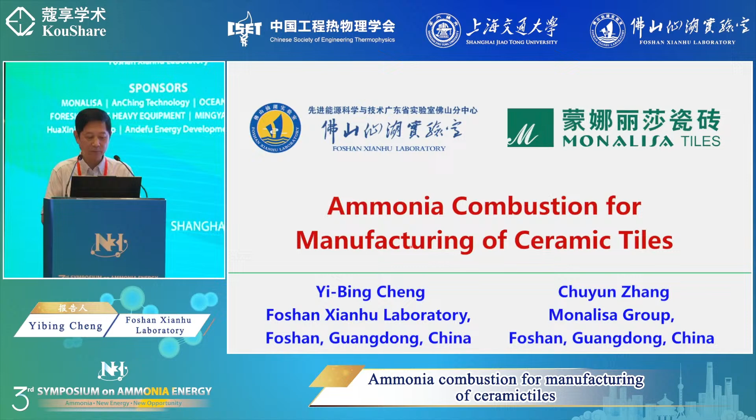The title of my talk is ammonia combustion for manufacturing of ceramic tiles. My name is Yibing Cheng from Foshan Xianhu Laboratory in Guangdong, China. Now, let me first give a very brief introduction about the Foshan Xianhu Laboratory. The Xianhu Laboratory is jointly established by Foshan City Government and the Wuhan University of Technology. The institute is focused on hydrogen energy research. It's also establishing the National Energy Key Laboratory for new hydrogen ammonia energy technologies.

It was established at the end of 2019, and in the first phase, the funding was $210 million US, and the current phase is about 280 million. It's fully funded by the government. Now, the institute is focused in two areas. One is hydrogen energy and fuel cell technology. Another is hydrogen ammonia technology.

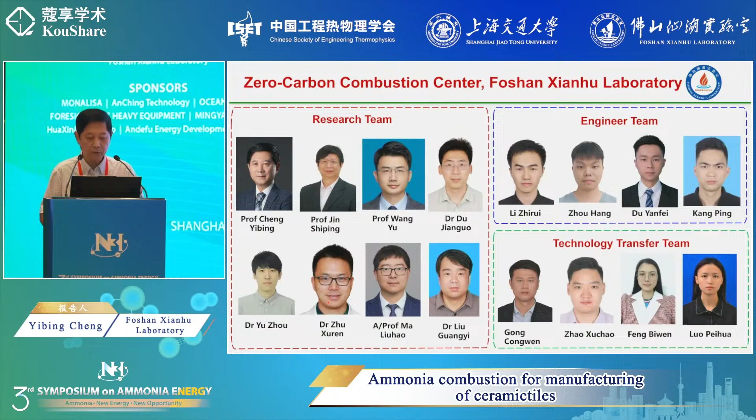So the first stream is using hydrogen through electrochemistry to convert it into electricity. The second stream is using hydrogen as a fuel to generate heat to either power the internal combustion engine or to power industrial furnaces. I'm heading this second stream, that is the zero carbon combustion center in this lab. In our center, we have a research team, engineer team, as well as a technology transfer team.

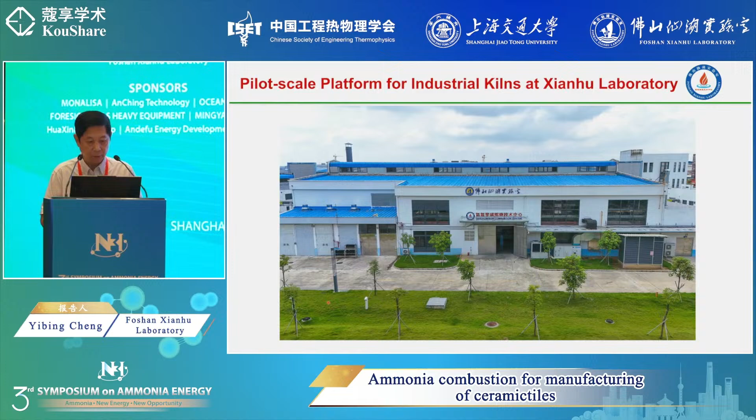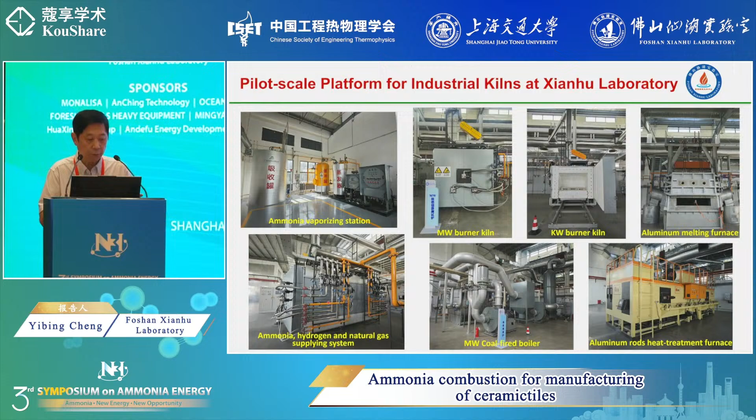Now, this is our lab. Our lab is 1,700 square meters, and we have a number of pilot scale industrial kilns, and they can fulfill a number of different functions. They can be for firing ceramics or aluminum melting or coal-fired boilers and aluminum extrusion and various different types of industrial products, which largely fit into Foshan's industrial structure. All these furnaces are equipped with ammonia, hydrogen and natural gas as a fuel.

Now, the objective of setting up this center is largely to meet the high temperature industrial challenge, because China is a heavy manufacturing country. And in China, we have a lot of high temperature related industries: electricity generation, metallurgy, steel, ceramics, cement, glass, and so on. All these industries are major sources of carbon emission. If you look at this map here, power generation, heating, manufacturing, and building materials account for over 70% of carbon emission in China. So this is a very large proportion of carbon emission.

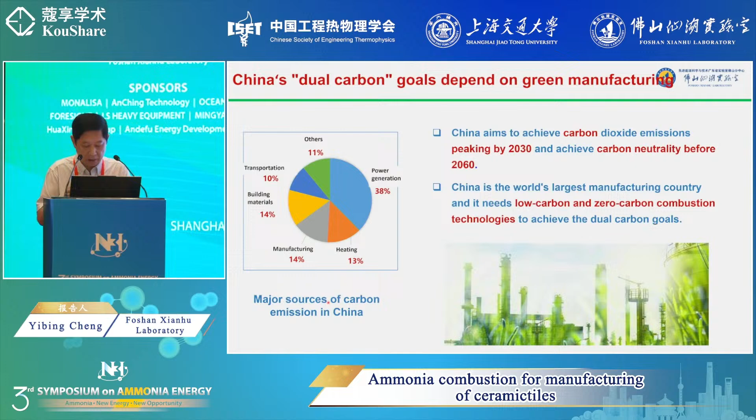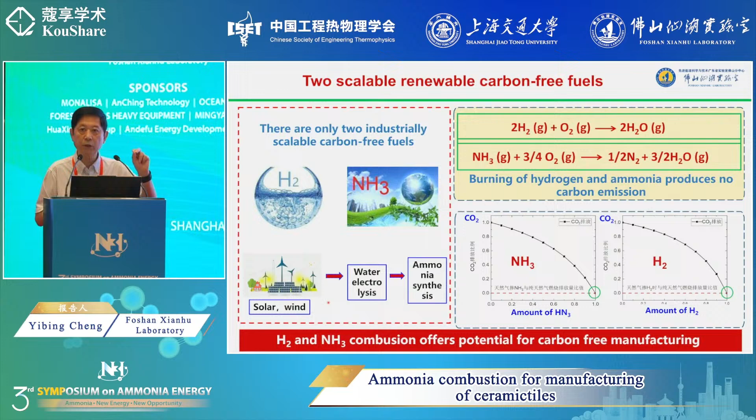The Chinese government has committed to achieve carbon dioxide emission peaking by 2030 and to achieve carbon neutrality before 2060. We call them the double carbon targets. To meet these double carbon targets, we must meet the challenge of the high temperature industries. We must develop low carbon or zero carbon combustion technologies. And as we know, there are only two scalable renewable carbon-free fuels, which are hydrogen and ammonia. When they combust, they do not produce carbon dioxide. When they are mixed with fossil fuels, there is a reduction of carbon emission. When they fully replace fossil fuels, they can go to very low or zero carbon emission.

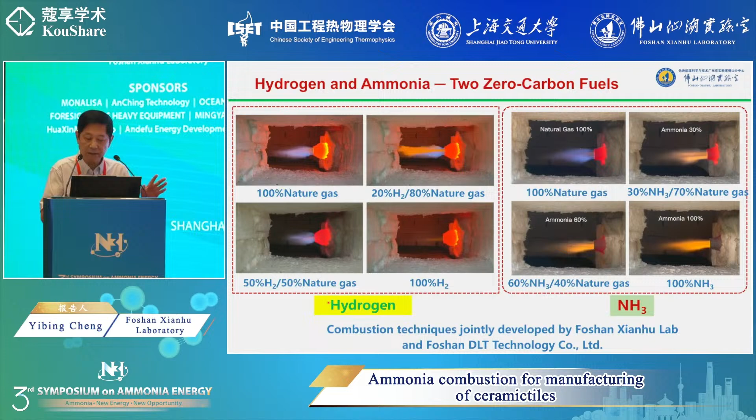Now, for these two fuels, we have tested them all. We have mixed hydrogen with natural gas or ammonia with natural gas. We can do them fully or mixed. And you can see that they have no problems in combustion. But there is a problem for hydrogen, because the transportation of hydrogen is quite challenging. And the storage of hydrogen in large quantities is also quite challenging. And this is a particular issue for manufacturing industries.

Let me give you an example. A ceramic production line requires 8 tons of hydrogen. And it requires 24 hours firing, 7 days a week, and 300 days a year. So for that, you must have a certain quantity of hydrogen stored in the factory. With today's technology, that is quite difficult. And if you store 3 days of fuel, that is 24 tons of hydrogen. With today's technology and regulation, that is almost impossible.

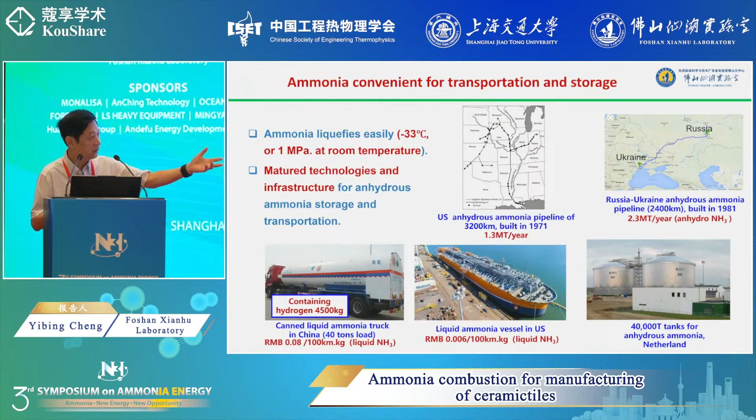Whereas with ammonia, it's a different story. Because ammonia was a fertilizer, a chemical, its regulations are quite mature. And it can be transported by trucks, by ships. Russia and America have long pipelines operated for over 40 years to transport liquid ammonia. And they can also have very large storage. And you can see that they have a 40,000-ton storage. These are quite mature.

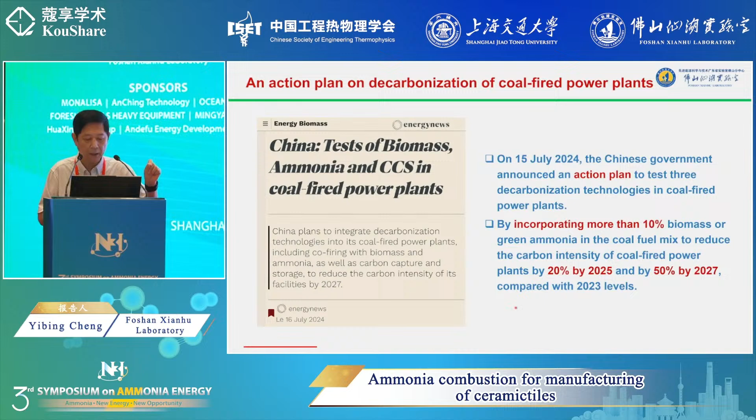Now, in recent years, China has initiated quite a lot of activities related to ammonia as a fuel. A recent development: on July 15, that is two months ago, the Chinese Energy Administration, that's the Chinese government, announced the action plan to test three decarbonization technologies in coal-fired power plants. They advised incorporating more than 10% of either biomass or green ammonia to achieve a 20% reduction by 2025 and a 50% reduction by 2027 compared to 2023 levels.

So what does that mean? In China, about 60% of electricity is generated from coal. In today's Chinese standard, for coal-generated electricity, each kilowatt-hour emits 0.91 kilograms of carbon dioxide, whereas for natural gas, each kilowatt-hour of electricity produces 0.46 kilograms of carbon dioxide. So what does that mean? It means that natural gas power emission is roughly 50% of coal power emission.

So according to that, you can see that by this demonstration action plan, it aims by 2027 that coal-generated electricity in China should roughly meet the natural gas emission. So that is quite an effective way of doing carbon peaking.

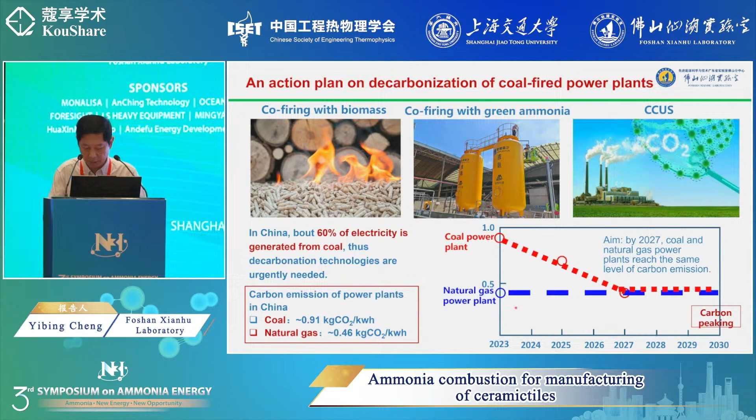Okay, let me give you some progress we are making in ceramics. On the 27th of December 2021, the Xianhu Laboratory combined with two local industries in Foshan, that is Osino Ceramics and DLT Technologies. One makes ceramics, the other makes ceramic furnaces. We formed a joint R&D center for advanced zero-carbon combustion technology. The aim was to modify this 30-meter-long pilot line from natural gas to ammonia.

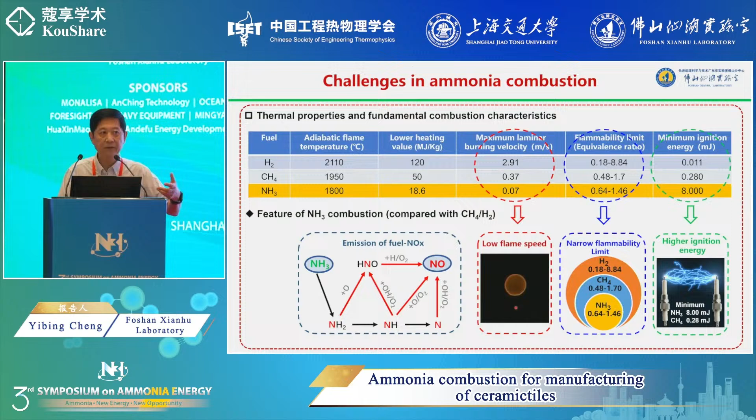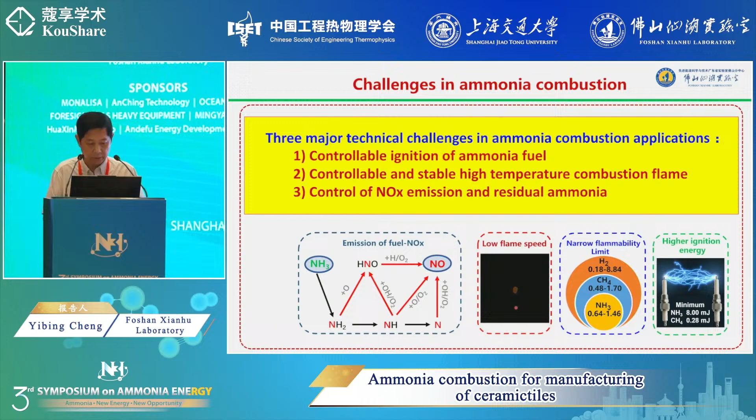As you know, there are a number of challenges to combusting ammonia, because for ammonia the laminar velocity is low, the flammability limit is very narrow, and the ignition energy is quite high. Also, because it contains nitrogen, there is nitric oxide emission. So for ammonia combustion in industry, you must overcome three major challenges: how do you do a controllable ignition, how do you do a controllable and stable high-temperature combustion, and most importantly, how to control the NOx emissions and the residual ammonia.

So on that basis, we developed ammonia burners for stable ignition and combustion. Here you can see this is a normal burner. We can ignite it, but we can't sustain the combustion. Whereas for the new burner we developed, you can have a stable ignition and also a stable combustion. So it's very important to develop a specially designed ammonia combustor.

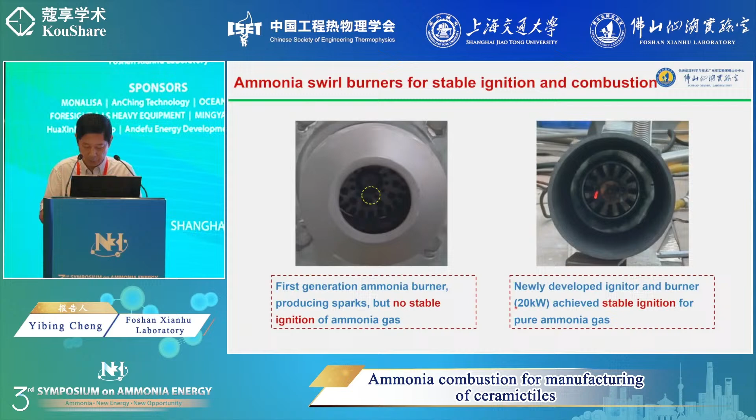Then we started to retrofit this kiln using the newly developed burners, and we developed multi-level approaches for de-NOxing in ceramic kilns. The first step is staged burning, then SNCR, and then SCR. The staged combustion burner has been very effective. You can see that the reduction of NOx by the staged burner has been quite obvious.

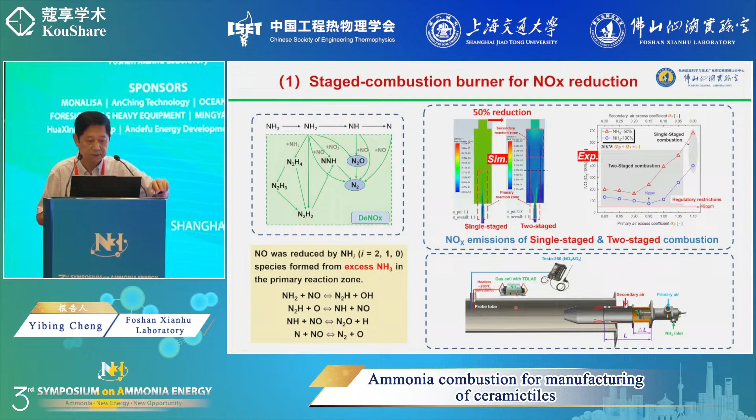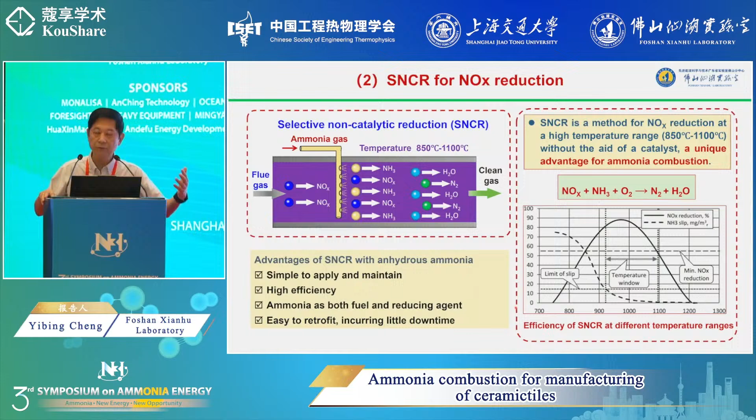We have also done selective non-catalytic reduction for NOx reduction. This is the advantage of ceramic kilns: because the firing temperature in ceramics is 1250, you can very easily identify a region in the kiln around 900 degrees C that allows for SNCR. And at the final stage, we have SCR for final de-NOxing. You can see that after all this, the reduction of NOx is very obvious. Finally you can get about single-digit ppm.

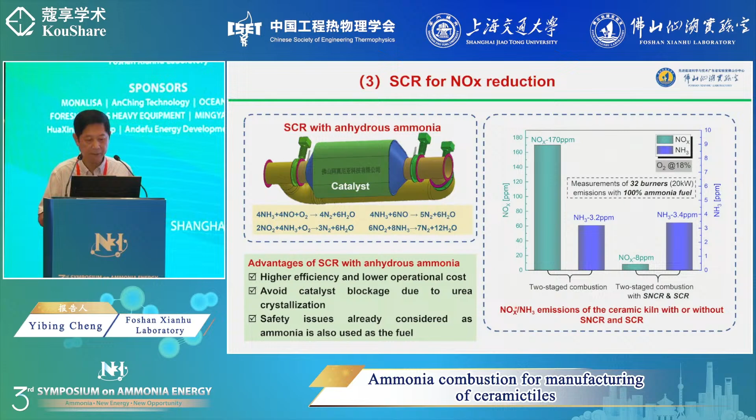After these combined multi-level approaches, we can significantly reduce the NOx. You can see that the staged burner gives roughly 35% efficiency, SNCR roughly 50%, and with the final SCR you can achieve 90% efficiency. So the final NOx emission is getting very low.

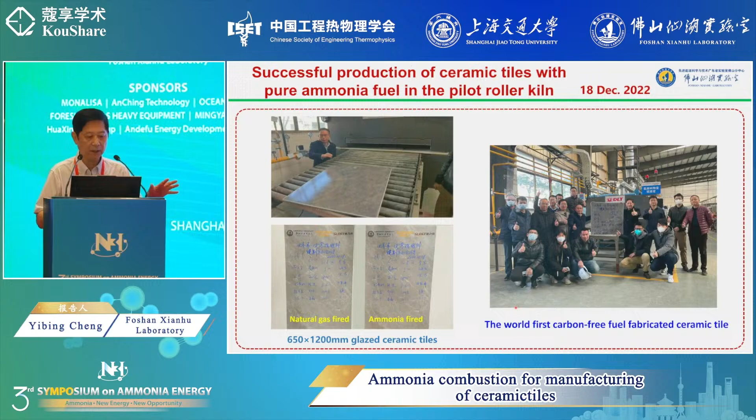It's getting very low. So on the 18th of December 2022, we successfully made the world's first ceramic tiles fabricated with carbon-free fuel. This is around a 650 by 1200 millimeter tile, and it was fully fired by 100% ammonia. This is certified by third-party companies who have done the exhaust analysis and some tests.

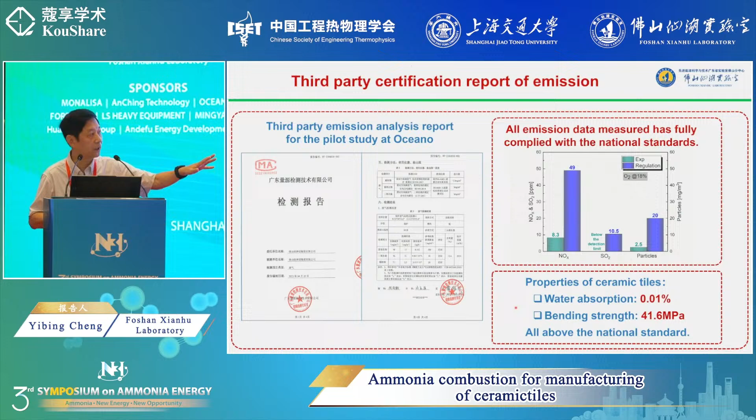You can see on the right side, the blue bars are the government regulation for NOx, for sulfur dioxide, and for particles, while the green bar is our result. You can see that the NOx is far below the government regulation, you almost can't see sulfur dioxide, and the particles are also very low.

Whereas after this pilot study, obviously the challenge is how are you going to move this further to mass production? And there are a number of challenges for doing mass production because of the high cost of retrofitting the production line. Ammonia is much more expensive than natural gas. There's no industrial standard or regulations for ammonia as a fuel. Ammonia has never been used as a fuel, so there's no regulation or standard to allow us to do that.

And also, the housing market in China is cooling, so the sales of floor tiles are also reduced, making it more difficult for the companies to implement new technologies, and another issue is that there's not enough green ammonia for you to do so. Let me tell you a tale of two private ceramic companies in converting this pilot study into mass production.

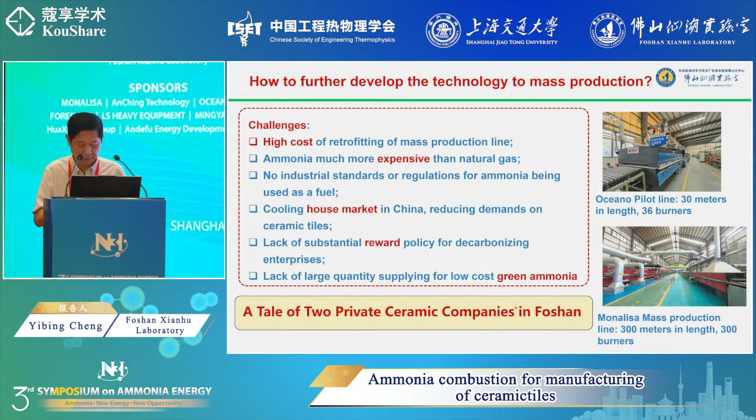For the pilot study, our collaborator was Oceano. Oceano is a private company. Its parent company was market listed. The sales in 2023 were roughly about $450 million annually. And they make all various different kinds of ceramic floor tiles.

Now, let me introduce another company, that is Monalisa. Monalisa is also a ceramic tile company, and it's itself publicly listed, and its annual sales are roughly about 950 million. So it's roughly two times the size of Oceano in terms of ceramic tiles.

Now, by late 2022, before we actually started our pilot work, Oceano informed me that they would continue to complete the pilot study. However, after the pilot study, they had no funding for doing mass production. They had already informed me, and that made me a bit nervous. Now, obviously, for me, my objective is to move that to industrial production.

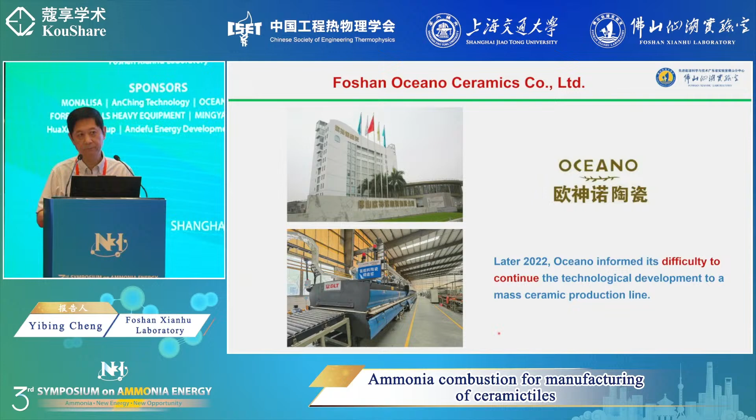So, on that basis, I started to talk to Monalisa. Monalisa is also in Foshan, one of the leading ceramic companies in China, the first publicly listed ceramic company in China. And Monalisa expressed interest; they have a 300 meters long ceramic tile production line, and they'd like me to convert that to ammonia. That is 1.2 million square meters of ceramic tiles per year of production.

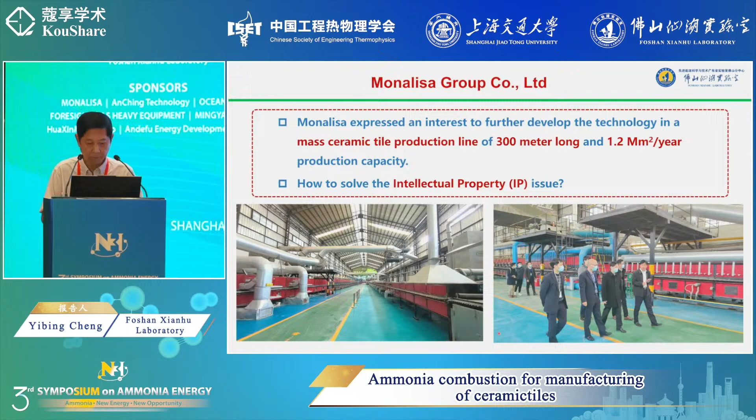Now, how are we going to solve the intellectual property issue? These two companies are directly competing companies. They're doing almost exactly the same products. Both are private, publicly listed companies. Now, after many discussions, as you can imagine, finally a win-win scenario.

We agreed to accept Monalisa as a new partner in this joint center, and both companies will allow each other to access their zero carbon combustion IP for free. So Oceano allows Monalisa to use the pilot scale study IP for free, and Monalisa allows Oceano to use their production IP.

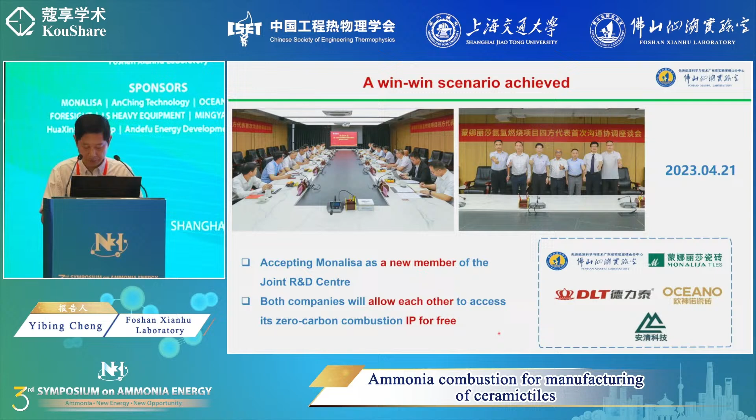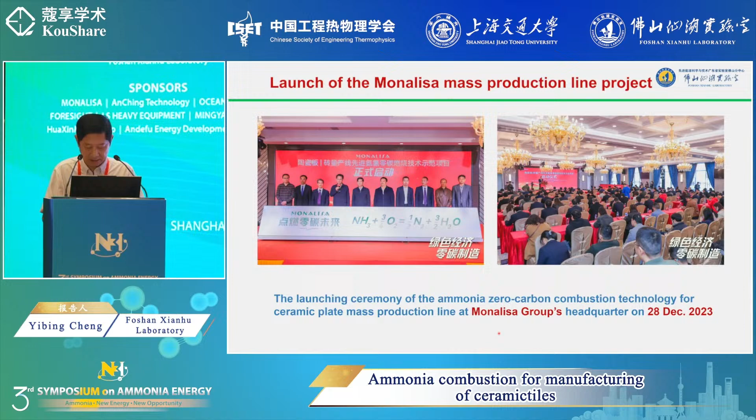So five organizations formed a new consortium, and in fact, all four companies are private companies, and they are all platinum sponsors of this conference, so they are very keen on doing that. On the 21st of April last year, we reached this agreement, which is great. And by the end of last year, we launched the Monalisa mass production line, and announced that this one started to work.

Now, actually, not until April this year did we start to retrofit this 300 meters long ceramic tile production line. And you can see that this is fully retrofitted with new burners and various deNOx facilities, and also construction of the ammonia station. When constructing the ammonia station, we met a lot of challenges, as you can imagine. This will be the first ammonia fuel tank built in a non-chemical site, in a factory site. There's no such regulation, okay?

The Monalisa kiln requires 12 tons of liquid ammonia per day, whereas in China, anything over 10 tons of ammonia storage is regarded as a major hazardous source. That requires very strict permissions and various regulations. So we had to talk to the Foshan local government. In the end, they were very, very supportive. They made our project a demonstration project, and allowed us to build a 30-ton storage tank on the factory site.

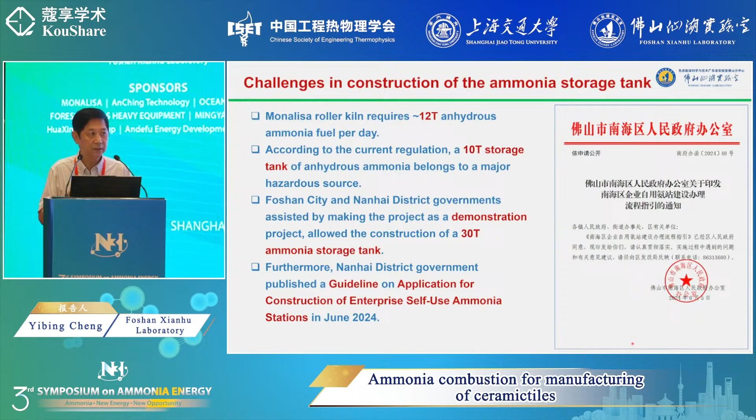In addition, the district where these companies and our lab are located published new guidelines for all enterprises in the district to construct self-used ammonia stations. I was amazed. They not only supported us, they extended that support to other enterprises. So we constructed our ammonia tanks.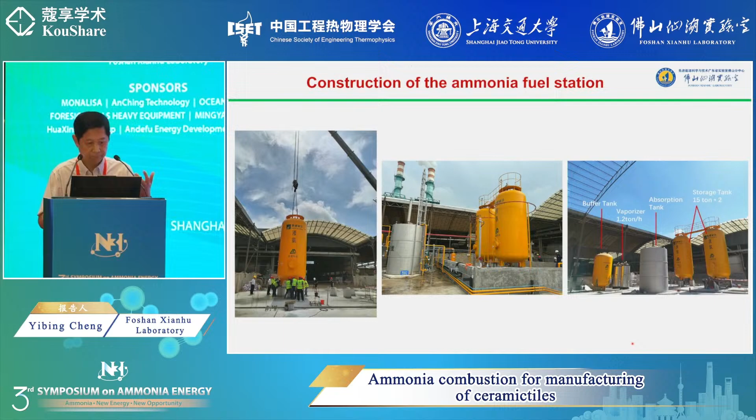Communication with government is extremely important for doing this kind of project, because there are so many regulations and restrictions. Currently, the government is very supportive. The Nanhai District government is currently planning to provide subsidies for the first 5 demonstration projects using ammonia as fuel for 3 years. I was very, very pleased to hear that.

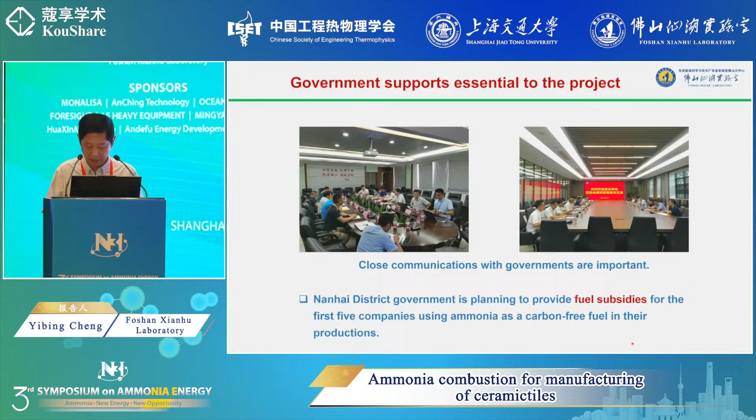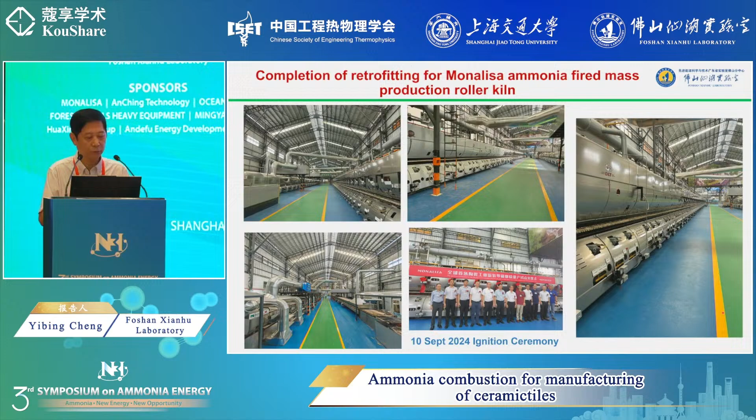Okay, so we started to retrofit this 300 meter line. This is before retrofitting, a beautiful site. We made a whole mess during the retrofit, and this is the final outcome. We finished this project just 3 weeks ago. And now this is where we have it, okay? You can see the whole kiln. We actually ignited this line on the 10th of September, less than 2 weeks ago. I made this movie on Saturday, just before I took the plane yesterday.

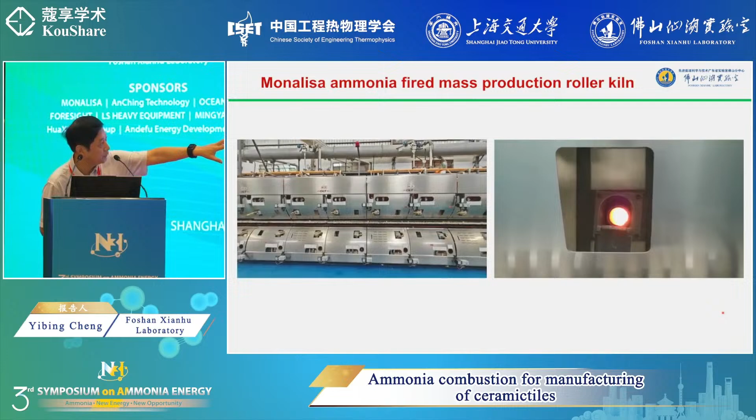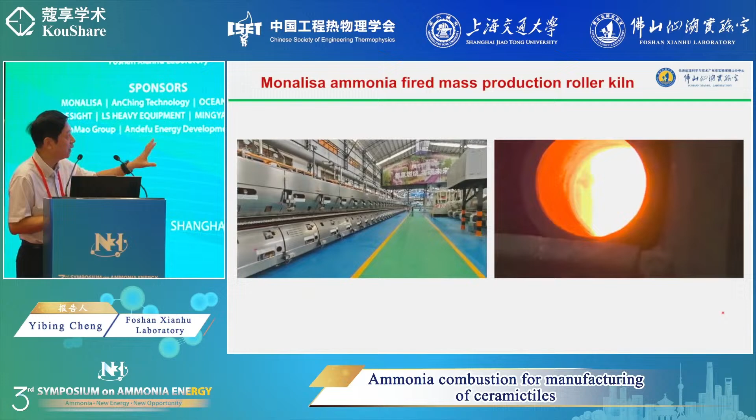This section is the firing section, and you can see there's a fire observer window in there. You can see that this is the ammonia fired temperature, 1250 degrees. The whole line is fired by ammonia, 100% pure ammonia. On the right side is the drying section. All the exhaust gas goes through the heat exchanger to the firing side.

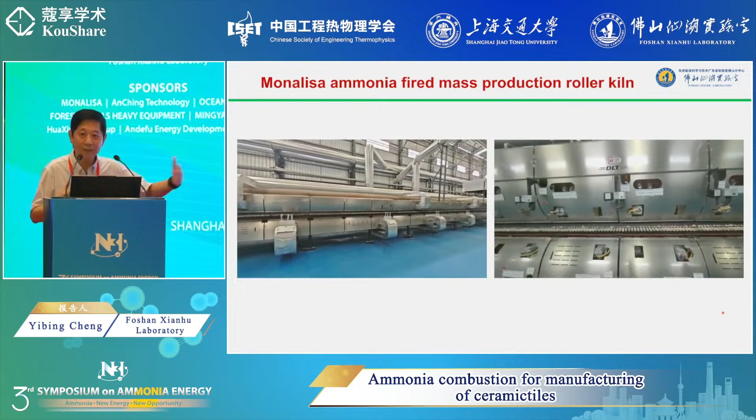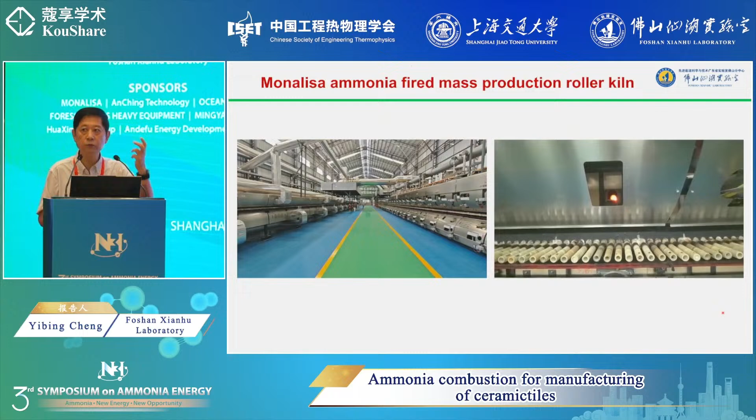So you can see that this is quite amazing. I can tell you, I'm from a university, and looking at the end product come out this way, I was so impressed. As I said, these industry people are so advanced, even beyond my expectation, in terms of the acceptance of this new approach and the new movement of renewable energy.

On Saturday, we did some initial test runs for these 900 by 1800 by 5 millimeter thick big ceramic tiles. The initial results were very encouraging, and I can tell you, the official launch of full production will come very soon. In the next few days, we are hoping to have an initial launch.

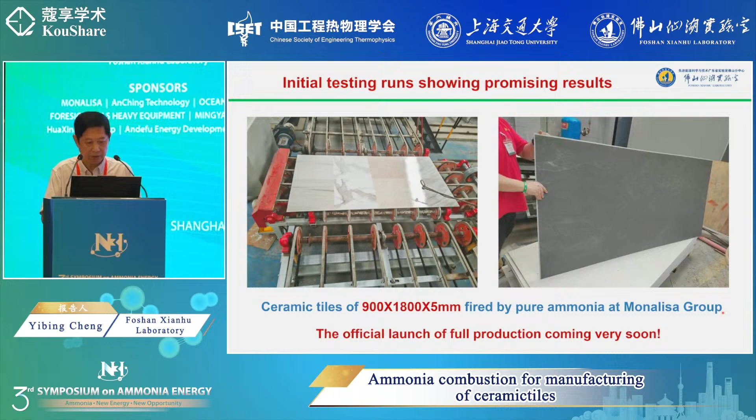Let me give you a brief summary. The high temperature manufacturing industry is a major source of carbon dioxide emission and needs technologies to decarbonize to meet the country's dual carbon goals. Hydrogen and ammonia are carbon-free fuels and can be made renewably at industrial scales. Combustion of hydrogen and ammonia can be a low carbon or zero carbon technology for high temperature manufacturing industries.

Now, I would like to introduce Monalisa Group, share how our green philosophy is embedded in our corporate culture, and explain our commitment to the ammonia hydrogen zero carbon combustion project. Finally, I will discuss our future direction. So here's my content list. I will go through these 3 chapters.

So who are we? Founded in 1992, Monalisa Group is headquartered in Xiqiao Town, Nanhai District, Foshan City, which Mr. Cheng just mentioned, the Buddha City, known for its beauty. We were the first building ceramics enterprise listed on the Shenzhen A-share main board, with over 5,000 employees and 10 subsidiary companies, and a comprehensive integration of research, development, creative design, specialized production, and market operations.

Monalisa is an industry leader. We operate 4 production bases and run 37 production lines, achieving an annual production capacity of approximately 160 million square meters. We lead the nation in ceramic slab industrialization.

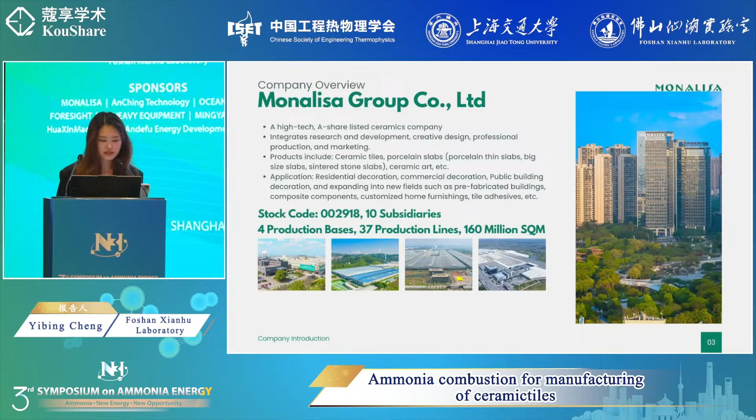Our development strategy focuses on big tiles, big materials, and big home. We are pioneering in large format tiles and sintered stones. Monalisa, QD, and Merqi are our key brands. Monalisa tiles are recognized as one of China's leading brands. Domestically, we have 4,000 stores and distribution points. Internationally, we have over 400, including 28 flagship stores overseas.

Our mission is beautifying architecture and living space, creating greater value for our employees, customers, and society by integrating Eastern and Western humanism, technology, and aesthetics. We bring the smile of Mona Lisa into thousands of homes. For clarity, I will refer to Monalisa as shorthand for Monalisa Group, and to the ceramic industry's ammonia hydrogen zero carbon combustion technology demonstration project as the ammonia hydrogen project.

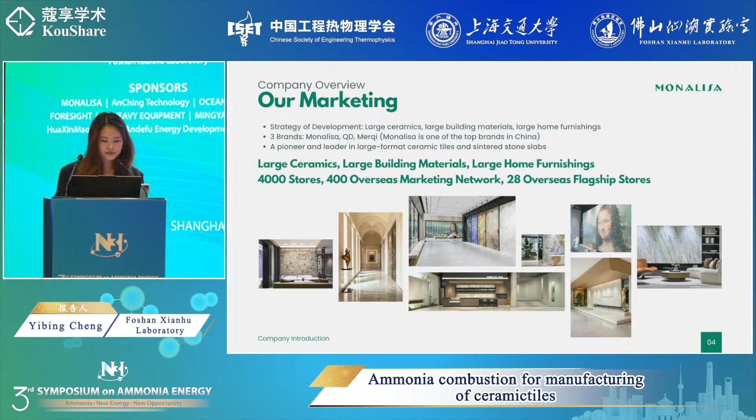In the second chapter, I will present Monalisa's green philosophy. In China, the building ceramics industry is at a crucial transition point from traditional manufacturing to advanced production capacity, particularly when compared to more technologically mature fields like photovoltaics, 5G, and lithium batteries. Our industry faces significant challenges from high temperature combustion, high energy consumption, and emissions. However, we firmly believe that the path to green transformation is irreversible.

For many years, Monalisa has committed to green development, becoming one of the foremost companies in the global building ceramic industry to drive significant carbon reduction. As a private enterprise, we recognize our responsibility and take on a leadership role, setting an example for local companies and inspiring high energy consumption industries to pursue green development through great actions.

To drive green production and technological innovation, Monalisa has implemented carbon reduction initiatives throughout the entire production process. As early as 2007, we undertook a key national project as part of the government's 5-year plan, establishing China's first production lines for 1,800 millimeters by 900 millimeters dry pressed ceramic slabs with a thickness of only 5.5 millimeters. For the products that Mr. Cheng introduced just now, we make 3 millimeter products.

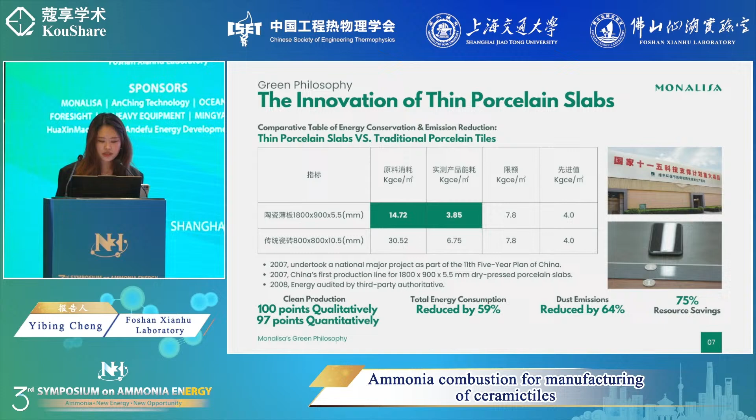This innovation allows us to maintain large sizes while reducing tile thickness, conserving raw materials, reducing firing times, and improving transportation and delivery efficiency due to lighter weights. In terms of technological innovation, this year we introduced advanced ammonia hydrogen zero carbon combustion technology and have gradually integrated it into our tile and slab production lines, aiming to replace traditional fossil fuels. Additionally, we have promoted photovoltaic projects to achieve cleaner energy and carbon reduction goals.

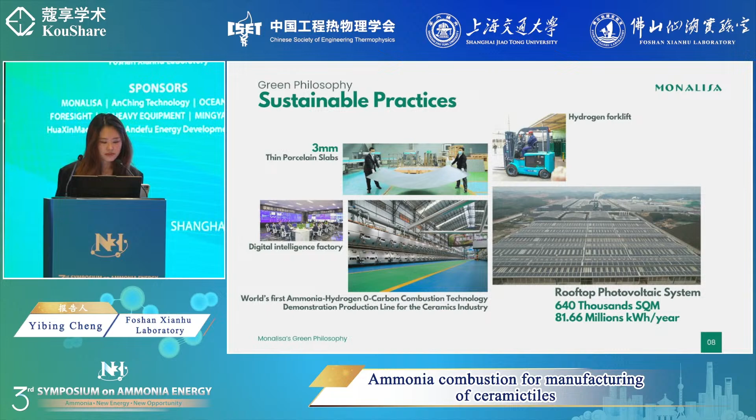In terms of energy saving and environmental management, we have implemented a comprehensive energy consumption management system, developed an intelligent environmental management system, and improved energy efficiency through technological upgrades. The company pays particular attention to the management of exhaust gases, wastewater, and solid waste, using advanced technologies to ensure that emissions meet standards, wastewater is recycled, and solid waste is sorted, treated, and recycled. Monalisa's dust control technology, from version 1.0 to the current 5.0, leads the industry in energy saving and emission reduction, setting the standard for green manufacturing.

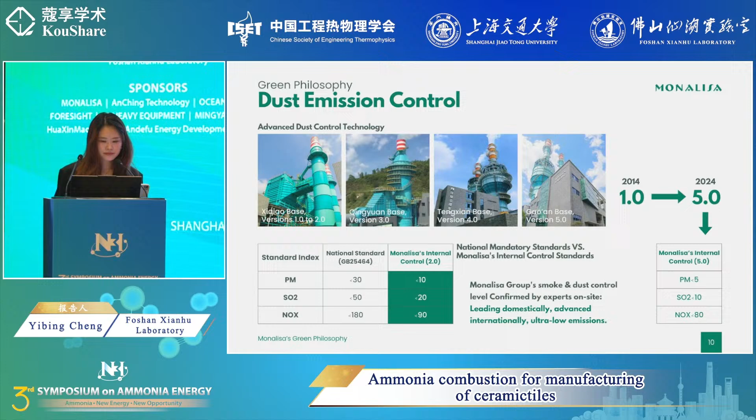Through green design and manufacturing, we have achieved zero wastewater discharge and 100% recycling of waste ceramic materials and raw clay, ensuring that our entire production process is environmentally friendly and further advancing the circular economy. Our measures not only align with the national double carbon policy goals, but also set an example for the green production of the ceramic industry.

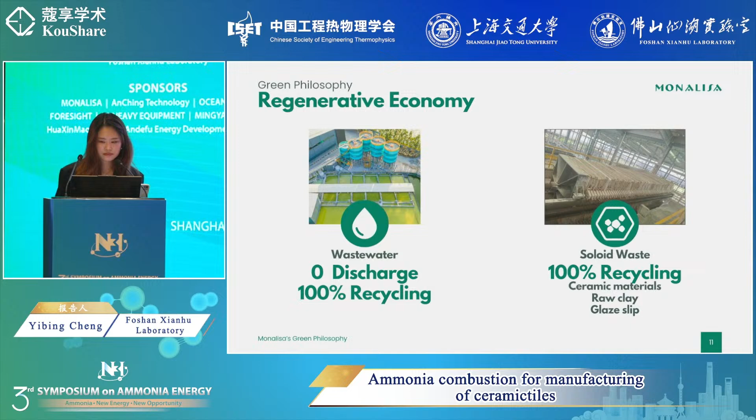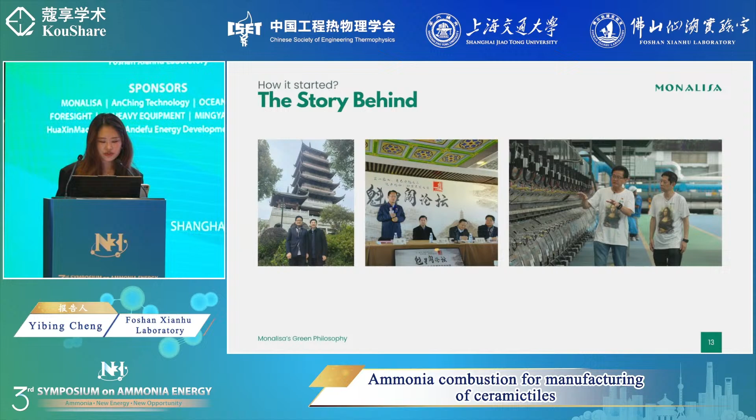So here's a little story behind the project, from long before the project began. Mr. Qikang Zhang, who is the director and board secretary of Mona Lisa Group, and also my father, met Mr. Chen at a forum. Their shared aspiration for zero carbon manufacturing sparked a strong connection. Following this, consensus was reached within Mona Lisa Group. Thus, in December last year, we officially launched the ammonia hydrogen project.

Here we come to chapter 3, why we devote ourselves to the project. I imagine many of you are wondering, why is Mona Lisa investing such significant resources in a project with seemingly uncertain returns? In today's fiercely competitive market, Mona Lisa, as a publicly listed company, has a responsibility to generate economic returns for our investors.

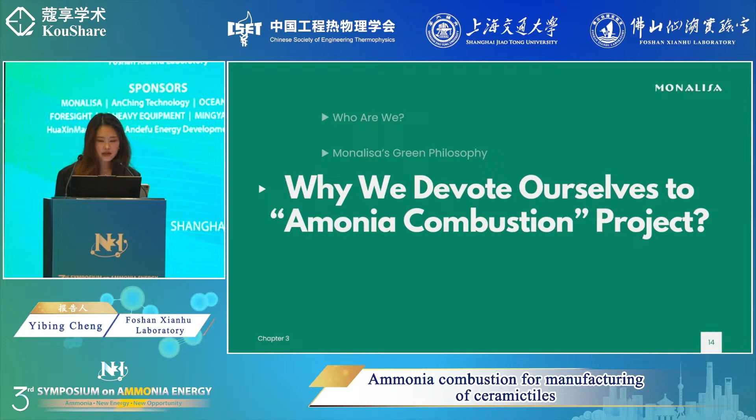Companies remain cautious regarding new energy projects, viewing the high cost and low immediate returns as a deterrent to investment. So why is Mona Lisa boldly stepping forward? To answer this, let me draw an analogy to flight. The initial phase of a flight consumes the most fuel, while cruising consumes significantly less.

This is very similar to Mona Lisa's ammonia hydrogen project. The early stage of the project, like the takeoff of the plane, requires heavy investment and faces many challenges. However, we believe that once the technology matures and is widely applied, we will enter a cruising phase where the economic benefits and brand value will become apparent.

We're not solely focused on short-term profits. Rather, we are aiming to enhance the long-term value of our brand through green and sustainable development. The green label itself has significant value. When customers realize that our products are not only of high quality, but also represent environmental responsibility, they will have a greater affinity for our brand. Mona Lisa's goal is not only to reduce carbon emissions, but to elevate brand value and create a greater market impact.

Today, my part will be sharing some of our progress at a new center in Singapore, the Centre for Hydrogen Innovations. I will narrow down to the ammonia projects in our center. And finally, I will be talking a little bit about ammonia cracking. Singapore is a relatively new comer to the hydrogen economy. Years ago, the nation founded its first center for hydrogen research. That's the Center for Hydrogen. It is jointly established by Temasek as well as the National University of Singapore, with a first phase initial investment of 25 million Singapore dollars. That's close to 20 million US.

And we have just started the second phase. So only 2 years ago, we started operation from the 1st of July, 2022. The center now has a temporary lab of 800 square meters together with office. The National University of Singapore is constructing a new building on sustainability and resilience, and the center is to further expand to more than 2,000 square meters in another 3 years' time. It is the first of its kind in Southeast Asia.

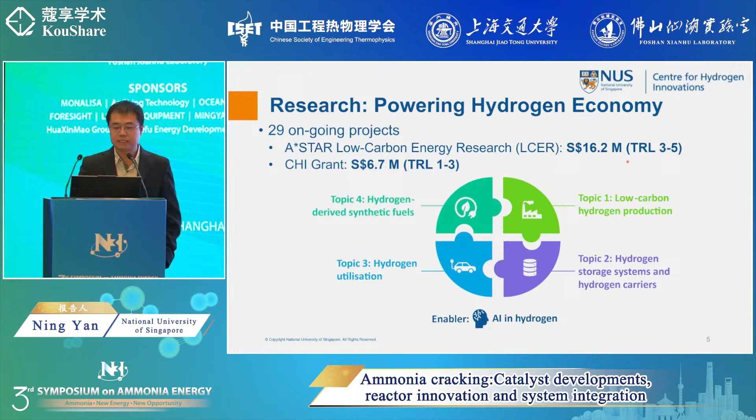On top of that, we have a few bigger scale, pilot scale projects, to solve problems at TRL level 3 to 5. As I just mentioned, the center is new. We don't have commercial product yet. However, we do have a strong emphasis on that. And from the beginning of the center, we have a very clear 2 pathways towards commercialization.

The first pathway starts by having a quantum leap hydrogen research grant, which has a size of 250 to 350K Singapore dollar. And this is a small scale, but afterwards, we hope some of these smaller projects become pilot scale projects jointly with company and government. And at this stage, the typical funding size will be 5 to 15 million Singapore dollars. For this type of pathway towards commercialization, collaboration with industry is key; as one example we are mentioning later, we have very nice collaboration with Siemens Energy.

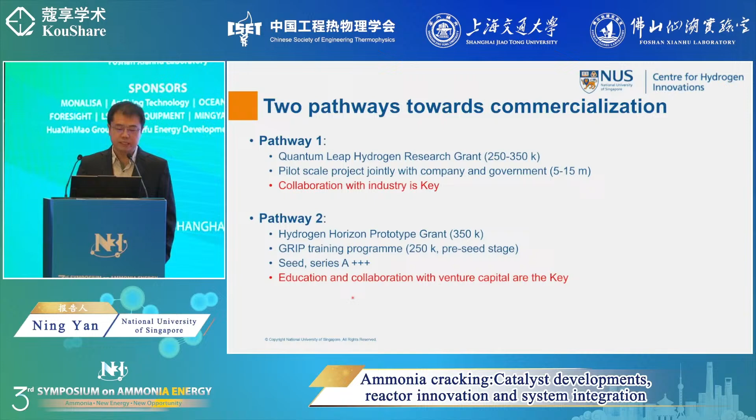And the second pathway starts also with an internal small grant, the hydrogen horizon prototype grant. The funding is 350K Singapore dollar. And on top of that, NUS will provide training, education, as well as another 250K seeding grant, so that the project after will be able to establish a spin-off company. And then Temasek and other funders will provide seed fund, Series A fund, etc. So it is venture capital. And along this pathway, education, culture building, and collaboration with venture capitals are the key.

The first example is a new development of an ammonia marine engine. This project is not led by me. It is led by one PI in our center, Wenming, from mechanical engineering in National University of Singapore. He first analyzed the bottleneck faced by some of the state-of-the-art ammonia marine engines. The key issues include the low ammonia energy ratio, the low thermal efficiency, typically less than 40%, high NOx generation, as well as very high concentration of unburned ammonia.

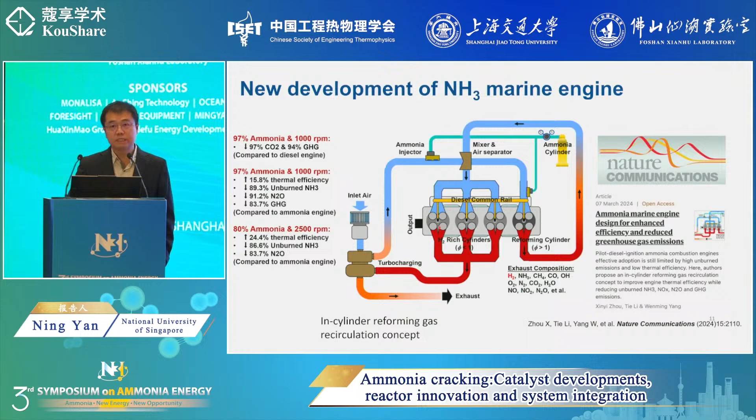And this work has attracted strong interest from the local agencies, in particular, Maritime and Port Authority of Singapore. And they are willing to support Professor Yang and his collaborators with an over $10 million pilot grant. I believe Shanghai Jiao Tong is also a key partner for this joint effort. They are going to work to build a pilot scale proof of concept engine that's based on this new concept.

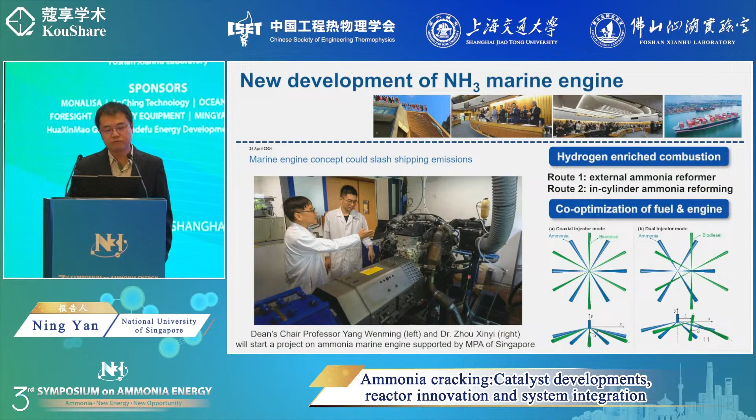The next topic, which myself is involved, is one project on partial cracking of ammonia together with gas turbine combustion. This project is by Professor Zhang Huangwei, also from mechanical engineering at National University of Singapore. Huangwei is, I believe, somewhere in the audience today. He's an expert in combustion technology. The team comprises multiple people, not only from mechanical engineering, but also from chemical engineering, from materials, as well as a few other institutes in Singapore, NUS, NTU, as well as A*STAR.

I'm lucky to be blessed to be supported by a team of strong international collaborators, a few researchers in Tohoku University in Japan, as well as Agustin, we already seen him a few times today, from Cardiff University, and from KAUST in Saudi Arabia. We have 3 industry partners, and the key industry partner is Siemens Energy. Actually, the project just started a few months ago, back in April 2024, with government support of $8.6 million and more than $3 million support from Siemens Energy.

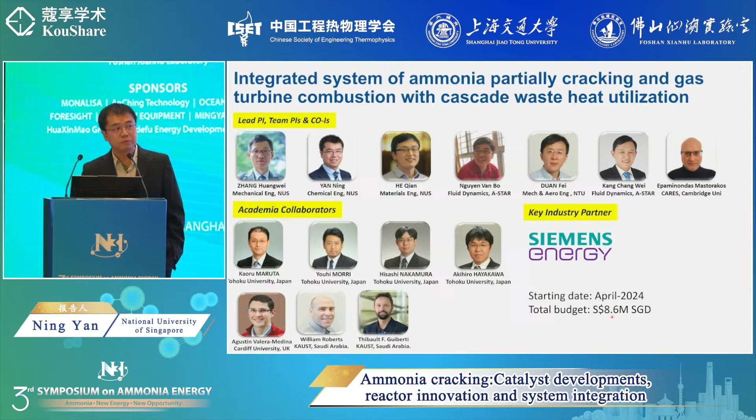A key for this project is ammonia combustion, but it is not a direct ammonia combustion. Rather, ammonia is partially cracked and then undergoes combustion. Why do we do partial cracking? For a number of reasons. We believe it enhances the combustion property of ammonia, and it may enhance engine combustion performance. And because of the endothermic nature of ammonia cracking, we may be able to utilize some of the heat so that the heat becomes the enthalpy of hydrogen and contributes to the combustion performance. Siemens will further elaborate on the advantages of ammonia cracking.

The overall research objective is to develop an integrated system with online cracking and gas turbine combustion. And the specific objectives include the development of scalable cracking technology and enhanced flame stability. And very importantly, the critical part is the development of an integrated cracking and combustion system. The overall project is divided into 5 work packages, with work package 2 as perhaps the most important supporting pillar.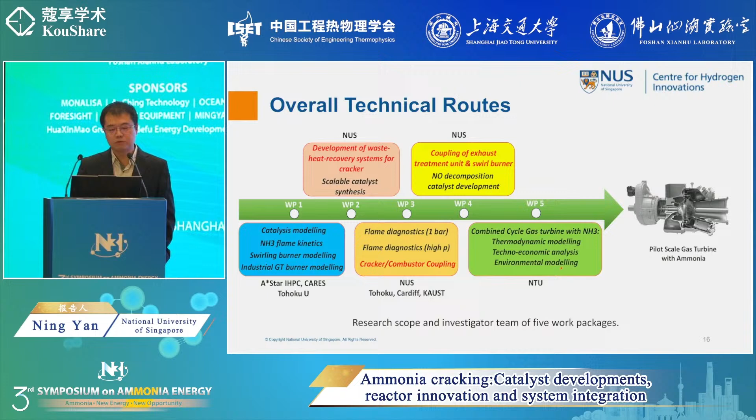And finally, I will use a few minutes to talk about some of the research progress on the cracking side. We have been working on cracking catalyst design so far, and the most common catalysts used for ammonia cracking include nickel for high temperature cracking, as well as ruthenium for low temperature cracking. Considering the high price and availability, one of our key targets is to develop noble metal-free catalysts for ammonia cracking. And so the first generation of the catalyst that we have identified for ammonia cracking is a cobalt magnesium entropy mixture.

The performance is as follows. At 500 degrees C, it can decompose ammonia almost 100% with very stable performance. We have tested online for 100 hours with no significant sign of deactivation. And at lower temperature, 450, it can crack between 90% to 50% depending on the space-time velocity. A slight disadvantage of this catalyst is that below 450, the activity becomes much less.

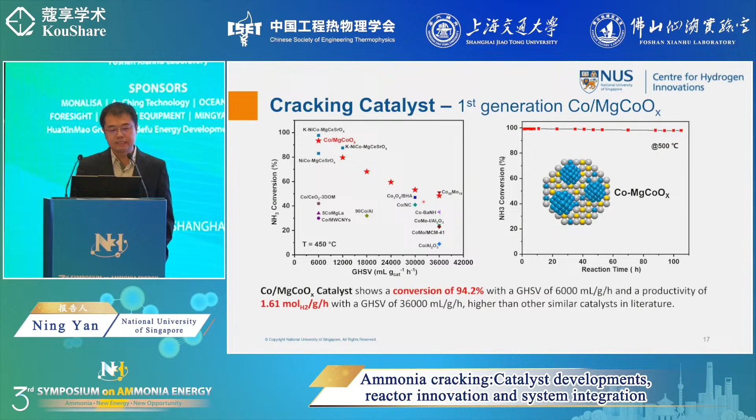So we have developed a second generation catalyst based on the first generation cobalt, on top of that lithium amide as a promoter. And this addition has significantly enhanced performance of the catalyst. At 350, for instance, it enhances hydrogen production per amount of catalyst usage. So depending on the temperature used, at higher temperature we can rely on the first generation; at lower temperature, we can rely on the second generation of the catalysts.

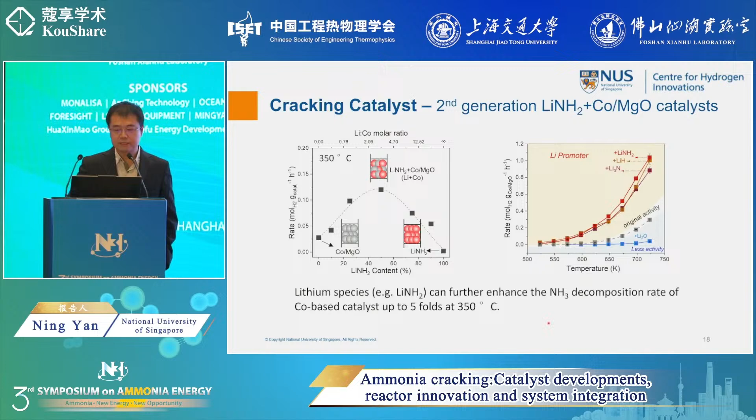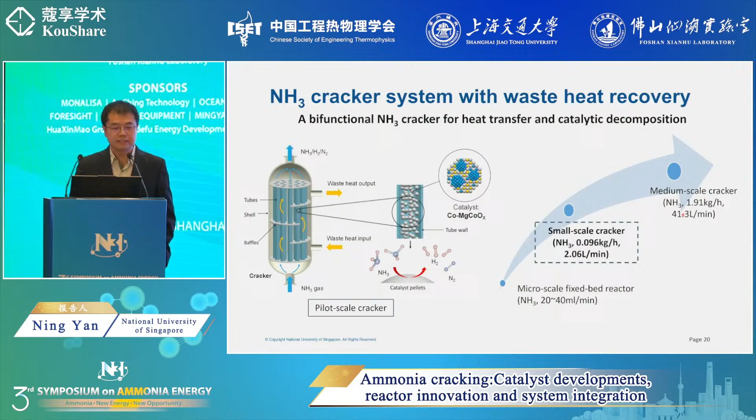And then for the cracker side, at present, the micro scale lab test is really small, only 20 to 40 milliliters per minute of cracking. We have already designed and built a small cracker with almost 100 times enlarged capacity, 0.1 kilogram per hour of cracking. And once the test is done and optimized, we are going to do a parallel design so that the scale can be enhanced to meet a medium scale cracker level that will have a capacity of about 2 kilograms by the end of this project. And then I have a few more slides on the detail.

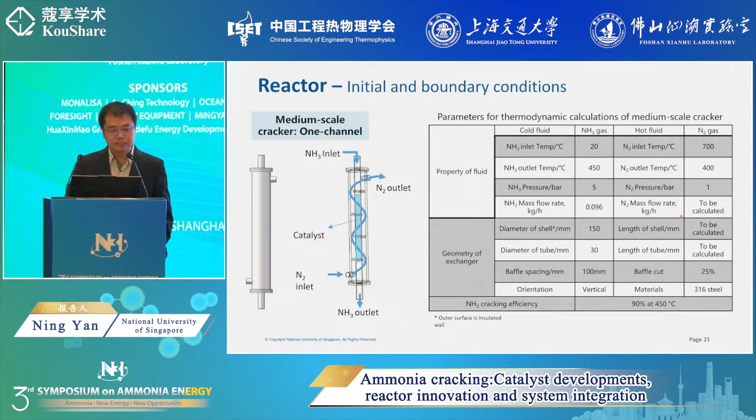Perhaps I can skip them. And now let me invite Sundar from Siemens to talk, where he will introduce from Siemens' perspective how to scale up the technology and the general ways of working with universities. Sundar, please.

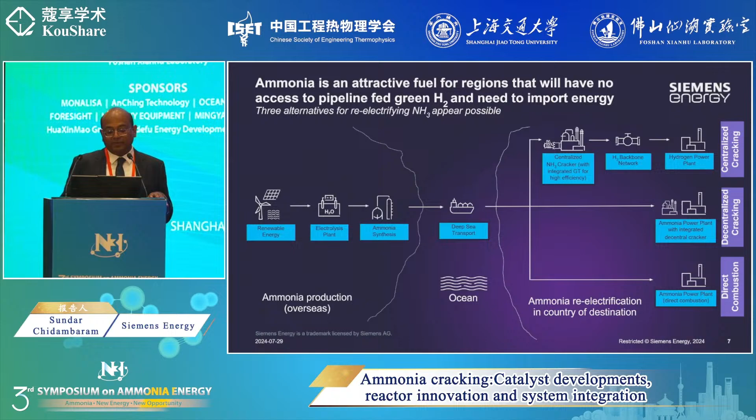So the third, we're looking at derivatives of hydrogen. That's where ammonia comes into play. So once you ship the ammonia, you can either have a central cracker and use the cracked hydrogen in your gas turbine, or alternatively, you can use other forms in the gas turbine. So you have the flexibility to use the ammonia in its direct form, partially cracked, or forms like biofuels as well. And that's pretty much what we want to focus on. We want to have that fuel flexibility.

So what are some of the downsides of having the conventional option? The first option is CCUS, which is the carbon capture, utilization, and storage, in capex and space. So what does it mean by significant capex and space? An initial study showed that the CCUS you need is almost the size of the power plant itself. So you need twice the space. So for countries which are very limited on space, this is going to be a big challenge to allocate the space needed for CCUS.

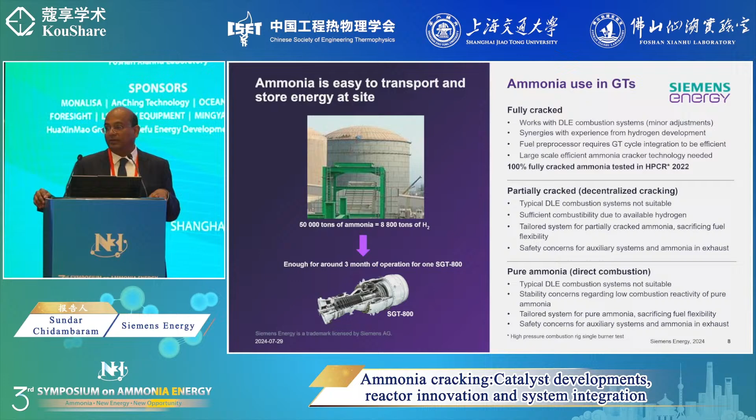The second part is from a fuel processing capability. Today, if we use partially cracked or pure ammonia, then it needs to be tailored accordingly. The fuel system, the delivery system, everything needs to be modified to a large extent. And lastly, safety is a concern because ammonia can leak. And that's where I think the existing experience we have with ammonia comes to our rescue. So we talk a lot about the benefits of ammonia, but what are the limitations?

And that's where I think Prof. Ning Yan touched on the fact that it will be a staged combustion, with a pilot fuel like hydrogen or natural gas to get to the right flame temperature and then eventually burn ammonia. The fuel toxicity is another concern as well, because there are health and safety aspects in using it. We also heard a little bit about the NOx and N2O emissions as well. The fuel corrosivity in terms of using ammonia directly in the pipelines is another issue that needs to be addressed.

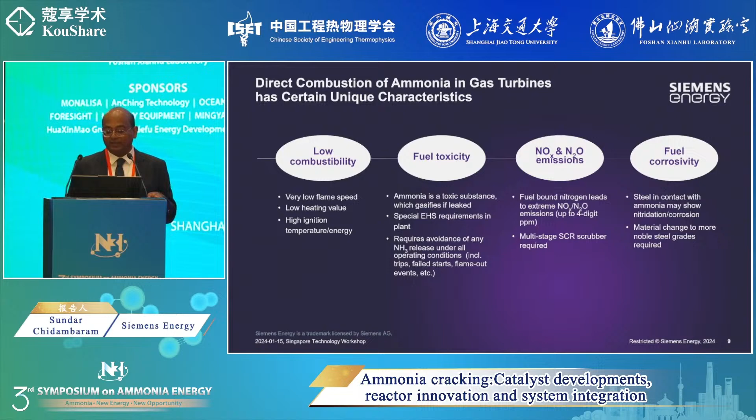That leads me to the second part in terms of industry and academia collaboration. So this is quite a familiar slide, and we have been working quite closely with SINTEF in Norway, as well as with Prof. Agustin at Cardiff. There are some joint publications as well between industry and academia in terms of early stage pilot combustion of ammonia.

Why I'm talking about this collaboration is industry alone will not be able to scale up this technology. We need a lot of cooperation with academia as well. And we think this collaboration with SINTEF would be a great way for us to progress this technology as quickly as possible.

So Prof. Ning Yan touched on this as well. There are 5 work packages. They cover aspects of modeling, which is work package 1 and work package 5. One talks more about the catalytic modeling, the other more about the thermodynamic modeling, and in between we talk about the new technology we want to develop. And why this integrated cracker? The primary reason is because footprint is a big concern for those struggling with space. And Singapore is a classic example where space is limited.

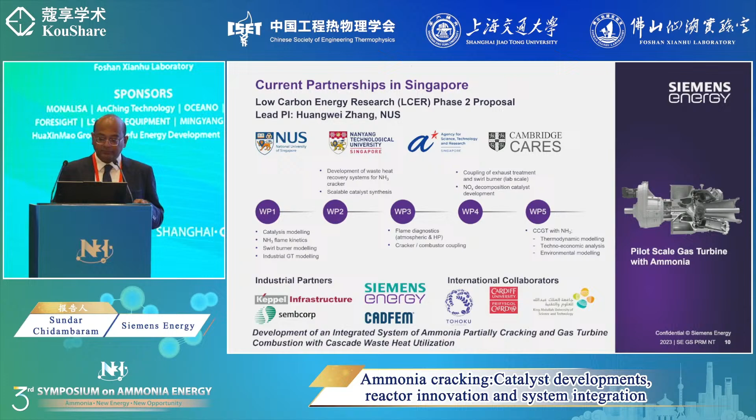If you look at the core technology and partnership in Europe, we had a partner, a paper and pulp company. We had initial testing done on the SGT-400, which is a 15 megawatt gas turbine, and it is running 100% on hydrogen today, with the same performance it would have with natural gas. This shows that we can really scale research into mainstream commercially available products, and we want to translate that same purpose into what we want to do in Singapore.

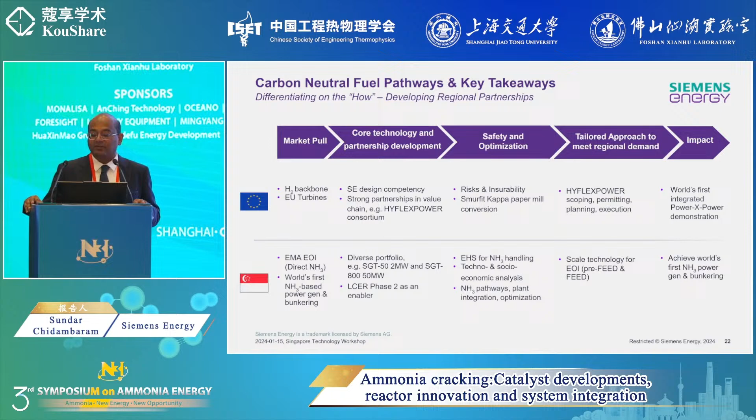And lastly, a quick summary. To achieve the goals of sustainability, affordability, and security, fuel flexibility is very important. Ammonia is a viable low carbon fuel that can potentially serve as the fuel of the future for gas turbines. Lastly, collaboration between academia and industry is vital for us to progress this and make it commercially available.